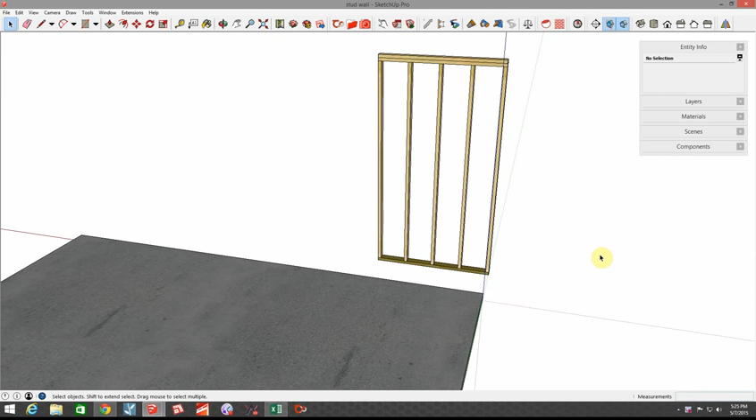Hi, this is John with Brockworks with a quick tutorial on how to use Profile Builder 2 to create a wall assembly, just a simple stud wall assembly.

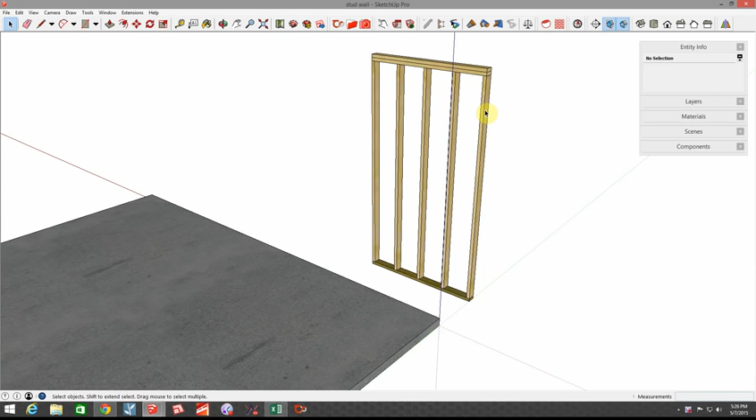In this case, I've got a bottom plate which is treated to go on this concrete, which is a profile that I used Profile Builder dialog to create my own lumber library. It comes preloaded with quite a bit though. And these are SPF 2x4 plates for on top, double top plate. And these are studs, which are 104 and 5/8 inch 2x4 studs that are components in my library.

So having those, we can go ahead and make the assembly. Choosing the assembler dialog, I'm going to do a new assembly, and I'm going to call this a 2x4 wall. You can add whatever description you want in here. You could say, 2